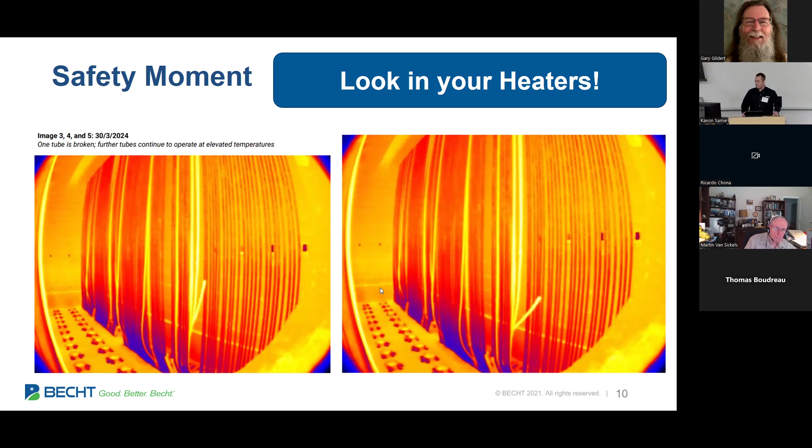Just go look, go think. We can have all the smartest AI tools out there and all the coolest cameras and the nicest heaters. This is not a bad design, but if you don't do the basics and think about it, bad things will happen, unfortunately. So I just wanted to share that moment. Okay, now I'm going to get into the meat and potatoes.

So this is Socrates. Anybody in the room remember Socrates? Good. I see some heads. Good. Yeah, he's a good dude. And I bring him wherever Frank is.

Frank Lu, there he is. He's in the back in the middle. I blame Frank for my love of Socrates.

So he had a triple filter test, and as Socrates got older, he started to realize, I only have so much time to ponder the things I want to ponder. So his time was valuable. So his triple filter test for you to get time with Socrates was supposedly, and again, this is I'm sure part myth, part legend, these three: Is it true? Is it good? And is it useful? So I hope in this quick little 20-minute thing, I am going to pass Socrates' triple

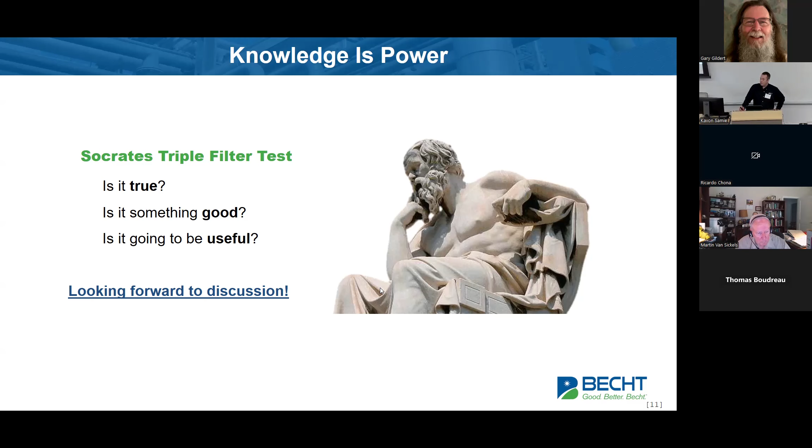filter test. I would really love some feedback afterwards, folks. If you're like, hey, that was a terrible presentation, I didn't get anything from it, please let me know. I have thick skin. It won't bother me one bit. I'm here to help, teach people. Knowledge is power and all that. So anyway, that's that.

So on to what we're actually doing. This is the quick agenda. There will be a lot of text on some of these slides, and I'll probably just talk to it briefly and then go. If there's anything you've got questions about, I'm flexible. Gary, do you care if we stop for questions as we go, or do you like to the end? Okay, cool. So if there's something you see on the screen that you're passionate about, get your hand up. Let's talk real quick. Or if you want to wait till the end, that's cool too. So this is basically what we're going to talk about today.

I already had a bio. So yeah, Exxon and Valero, and now I work for Becht. I'm a bit of a generalist. I'm a chemE by background, a lot of time in process and ops. About 5 years ago, I really started to get into the weeds on fired equipment and thermography. And over the years, I've gotten more into energy as well. So I will say I'm probably a novice in the world of energy. It's pretty cool, in the room here, like Alan, there's people who helped invent pinch. I'm on the very novice side of all this. And I try to participate in API 560 when I can.

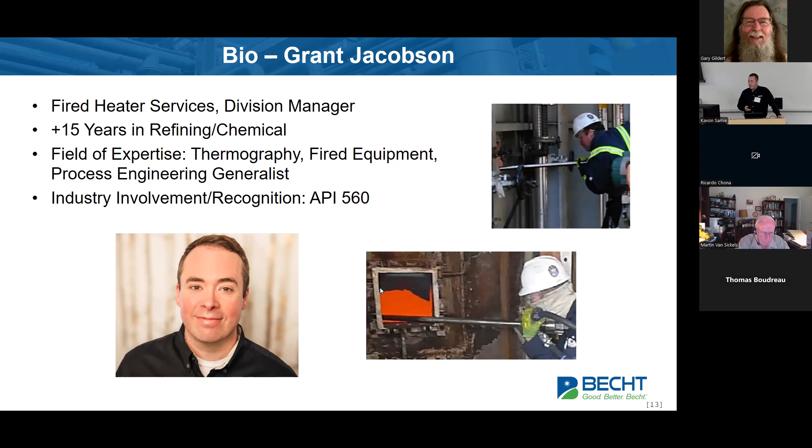Okay. So, energy, and I wanted to talk a little bit about this culture. Realistically, in most refining or petrochemical applications, I guess any industrial application, what priority is energy? I can tell you it's not number 1, but what do you guys think it is? Second to last. Yeah, that's actually probably a good answer. I would say everybody hopefully agrees safety is always number 1, whether or not folks are good at it. Reliability, usually number 2. Profitability, usually number 3. You could say 2 and 3 are kind of interchangeable. And then number 4, energy, maybe. There might be another priority before energy.

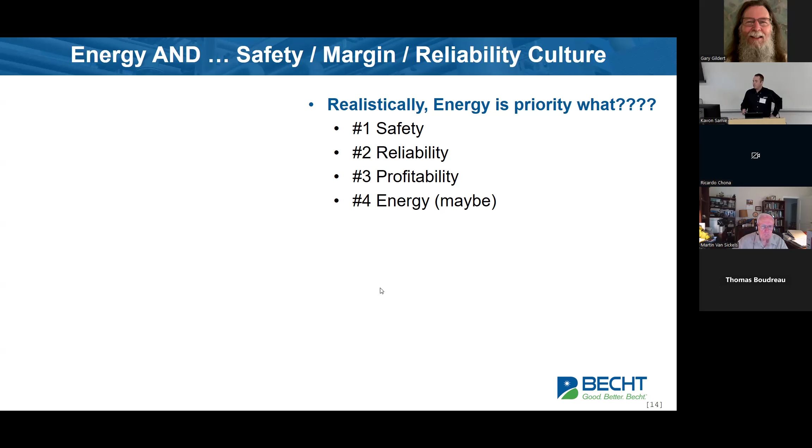The other thing that makes it hard to focus on energy, and Gary, this is the old slide deck, that's okay. I had a new chart published 2 days ago that showed energy prices. Same story, this is just an outdated chart. Energy prices in the US are low, right? There's not a lot of incentive for us to go chase a margin on energy projects. So these are the things working against us.

What I like to think about is, you can have your cake and eat it too. You can be safe and be energy efficient. There's no reason you can't do both at the same time. Ditto to reliability to some extent, depending on what you're trying to do. And I would like to mention, between the US and Europe on the updated chart, which sorry, I don't have in this deck, it's 3 to 4 times more expensive for a megawatt hour right now in Europe than in the United States. So Europe has way more financial incentive to be clever about energy, go build good things with energy.

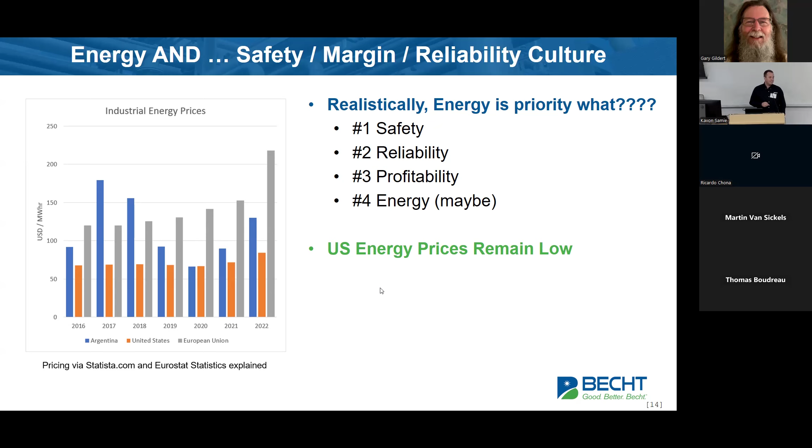The US is a market that's probably less interested in chasing it, but it's pretty neat having forums like this where we're talking about it, thinking about it, because I think it's important. We don't want to let the Europeans get too far ahead of us. That's the way I feel. But I work in Europe all the time too, so they're good folks.

So the things I'm going to talk about, and I'm sorry, of course, this is going to look kind of pitchy because this is coming from decks that I sell off of, but the intent is I'm just sharing knowledge. So sorry if I'm crossing any lines there.

It's not intended to. So the 2 ways that we kind of approach energy stuff at Becht, we've got PEAK, which is a practical energy assessment, and then Bravo. Basically, PEAK is high level, simple, practical. Bravo is the really detailed one, to get a bunch of really smart people looking at stuff, lots of things to do.

These are just kind of, I think, some benchmarks you can think of in this realm. And there's other consultants that do other things. This is the way we kind of do it, but I wanted to show it to give you all a flavor for how people go tackle this stuff. And a lot of companies have this in-house. You go to the Shells, you go to the Exxons, they have things like this that exist within their operating systems already.

But Peak for us is a lot simpler, a lot cheaper. Duration is much shorter, much smaller team, only 3 people if we go to a Peak versus a Bravo, it's 6 to 8. It just depends what you're doing. Also, in Peak, which is what I'm going to talk about a little bit more today, on the practical side, it's really just kind of a lot of checklists and spreadsheets.

I know that's not sexy, it's not cool. But when you're blocking and tackling, it's culture and behavior and how are you communicating? What are you focusing on? When you get into the more complex stuff like Bravo, you're talking pinch, you're talking how do you look at the energy efficiency of units, all sorts of fun balances and things like that, which you can do on simple sheets too. But these are kind of the 2 categories that I break this stuff into.

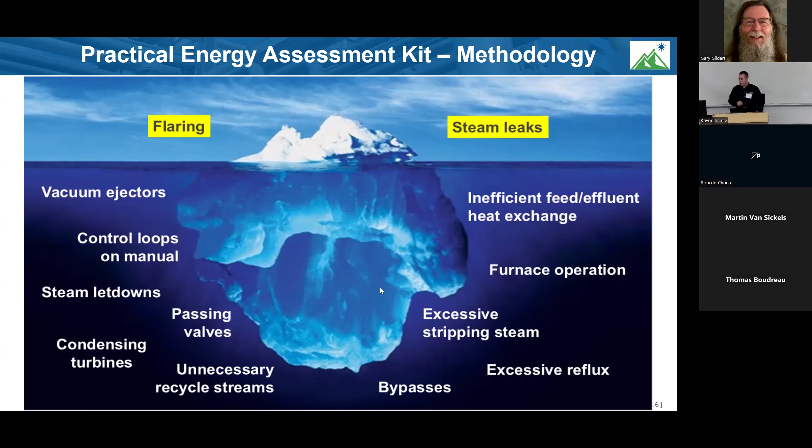Bypasses are a great one. I love walking hot trains and cold trains on crude units. People accidentally leave bypasses open all the time. And most of the plants in the US, unfortunately, are a bit older. We have less instrumentation. You don't have the TIs to be able to easily tell something's open. So, walking it, thinking about things. The reflux one's a good one too. Sometimes you just spin up columns and you don't mean to. So anyway, lots of examples there.

So the way that I like to approach this practical stuff, it's a tool that basically is just a big Excel sheet. It's a fancy Excel sheet is the way I would think of it. But to be practical in energy, it's people and processes and practices. It doesn't matter what kit you have built. If you're not running it the best you can, it doesn't matter. So the way this score thing I'm going to show you is set up, it's got 4 elements, 21 sub-elements, a bunch of different topics.

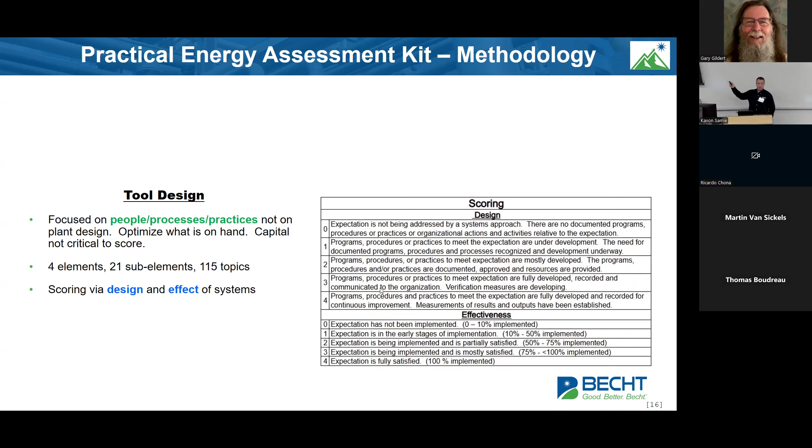The scoring is set up like this. If there's any ex-Valero folks or current Valero folks out there, this is where I was exposed to this kind of methodology. You'll probably recognize this. I think originally this idea came out of FlowServe, one of the roto vendors long ago. But I really like this scoring mechanism for looking at how are you designed, how are your systems set up. Design doesn't just mean how's your plant built. It's what practice do you have in place? What culture do you have in place?

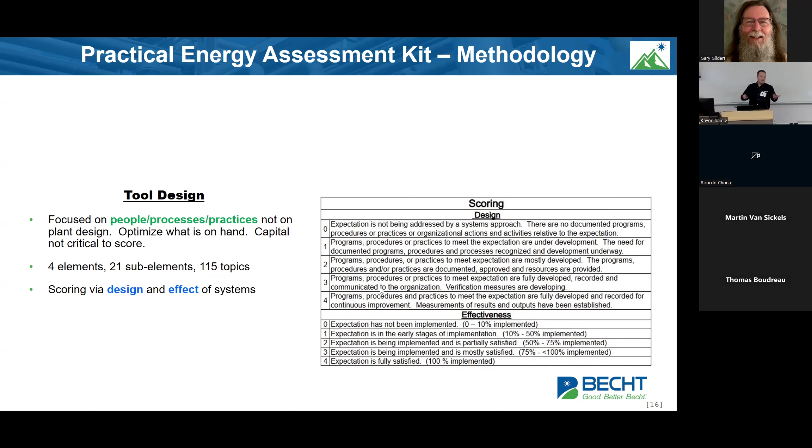And then effectiveness is, are you doing what you said you were going to do? So a pretty simple way to just kind of go look at stuff and rank yourself. And once you can kind of rank yourself, you get out of the qualitative feel and get a little more quantitative to see the gaps.

This is like a little performance matrix when we go do these kinds of energy assessments to kind of say, where are you versus the others out there? Not nearly as fancy as like the Solomons and those. This is more like, what do we see as folks working in this realm and focusing on energy? But that's what we kind of look at.

And I like to mention, you see folks who we consider good, in our little tool here, based on these rankings and these elements, you get to 75% and you've probably caught most of the really good stuff. Do you really need to focus more at that point? Probably not. Then it's more of a maintain kind of position. The first time we go in and do stuff, you're going to be in the 20 or 30% range. And I'll show you an example of that in a minute.

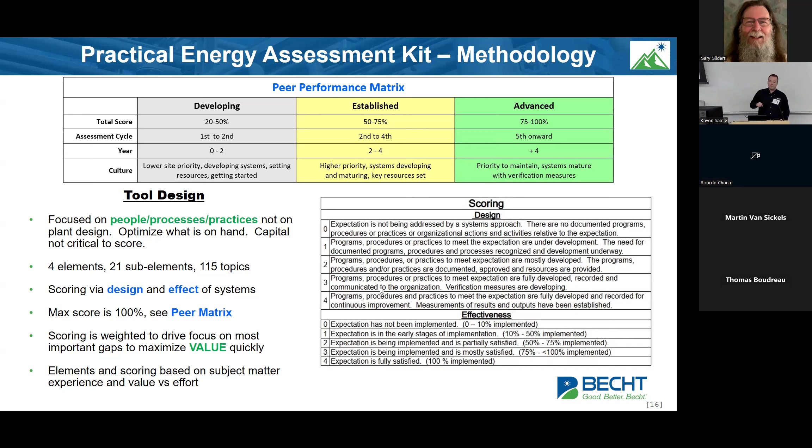And then the last two here, scoring's weighted in this kind of tool. So if you go build something or do something like this, think about the value behind the thing. Not all focus is the same. And I'll go to the next slide to kind of show that.

So this is just a quick screen capture from this little organization tool that we use. And when I'm talking about scoring and what matters, this is basically saying there's different weights for the different sub-elements that we're looking at when we go do these. The gray is the max score and the yellow is the actual score from this example. So on this one, this was the first time, fuels refinery, mid-sized, 33% was their score. They were trying, but they were kind of on the beginning of their journey.

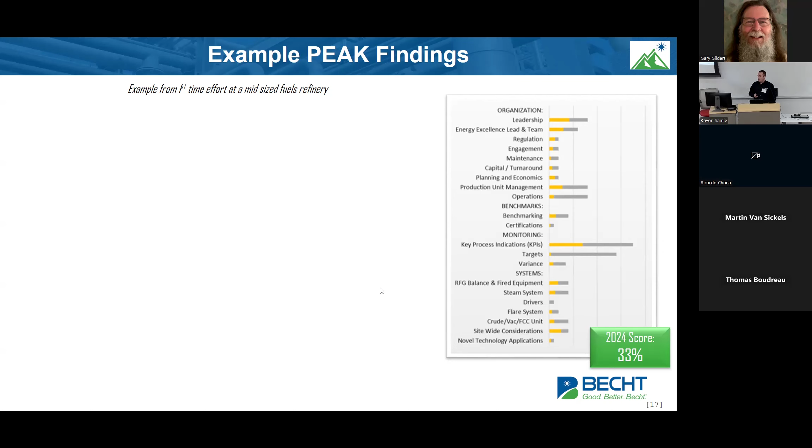So talking through the four big elements, and I'm not going line by line or anything. The key thing that they were doing right on the organizational side, they were starting to think about it. They're starting to talk about it. If you don't even talk about energy or think about your culture or what you want to improve on, there's no point in doing it or focusing on this. So that was a big thing out of that.

The other one that was really interesting, the panel operators weren't really empowered to go and chase things or do things better. It wasn't easy for them to see, oh, I could reduce the stripping steam, or why is my reflux so high on this column? There weren't really any easy tools for them to watch that stuff with. So that's a big one too, organizationally, that we find.

Going to the next one, benchmarks. So there's some good stuff out there. ISO 50001 and 2. There's also a really good list that the Department of Energy puts out that has a lot of good ideas based on different technologies that you might have in a petchem or refinery. Good things to look at. It's a really small piece of the whole puzzle.

Like when we go do these, monitoring is a big one. KEV is key energy variable. Some people call them KPIs. Whatever you want to call it is cool. You've got to have something built. You've got to have something you're measuring or looking at. For KEVs, for most mid-size, mid-complexity refineries, you're probably talking like 20. You don't need a bunch of these. And a lot of them are kind of cookie cutter.

You can easily Google the efficiency calculation for fired equipment. That's like the first one. It's just easy, folks. Here's the calc. Go build it, put it on every single heater you've got. Really easy to go chase. So stuff like that. And then systems.

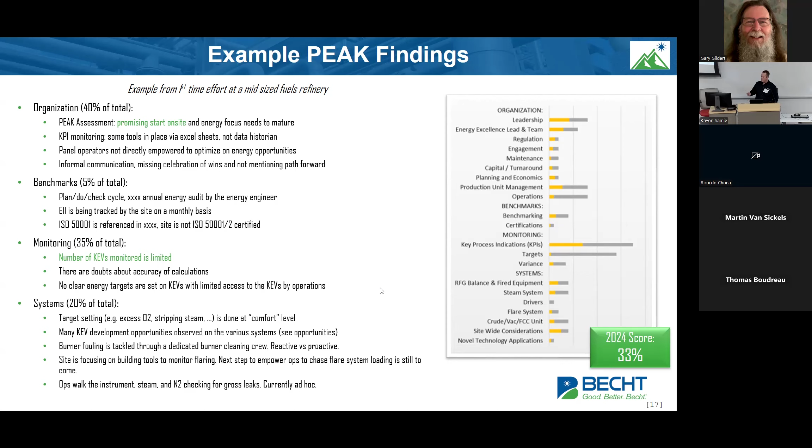So after you have all that stuff done, how do you go get better? So it's nice to have some sort of roadmap. So I'm just going to show you guys, here's how we kind of look at it.

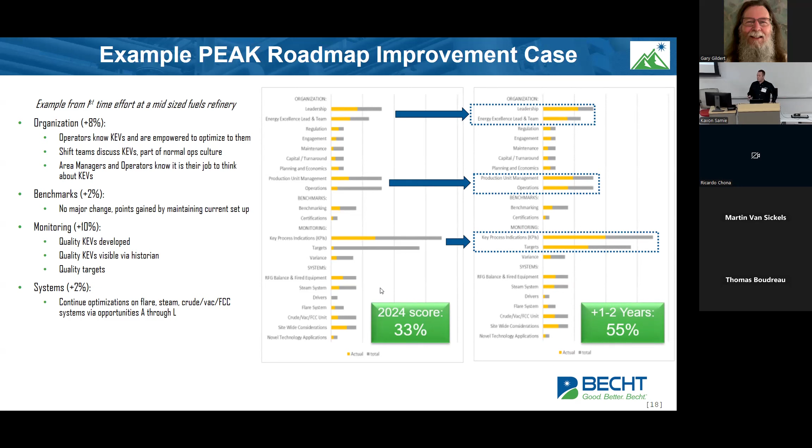So, the big areas that this plant was going to focus on were these three. And with that, they were hopefully going to get around 55%. Of course, we're making assumptions in the scoring when you do a shift case like that. But it helps to kind of visualize the path. That's the intent. I got all this stuff. Here's how I rank it. Then what should I go do first? What gives me the most bang for my buck? That's the point of doing something like this.

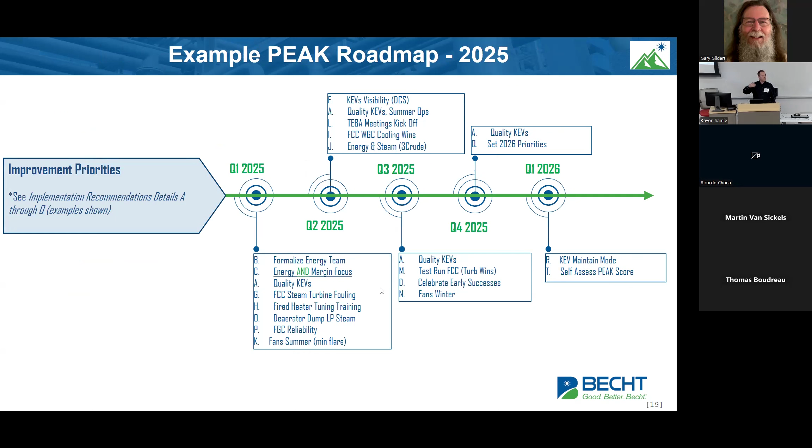This is another way to look at it. So this is a roadmap for this example. And these were all the different things to go focus on. So each one of these lines was basically a simple slide or two saying, hey, go do this. Like, this is the thing that will help. And then just some basic times. So it's not set in stone. You don't have to stick with it, but at least there's a plan you can try to go and execute. And then these are just a couple examples of what these things look like when we write them up. Pretty simple, pretty concise.

The simpler you can make it, the more visual you can make it, the better for almost, I think, any kind of industrial situation you're looking at. People have short attention spans. TikTok, everybody wants the 10, 20-second video kind of thing. I think we all need to be aware of that as engineers. We get really detailed, really wordy. We got to step back from that stuff sometimes if we want people to understand what we're trying to communicate.

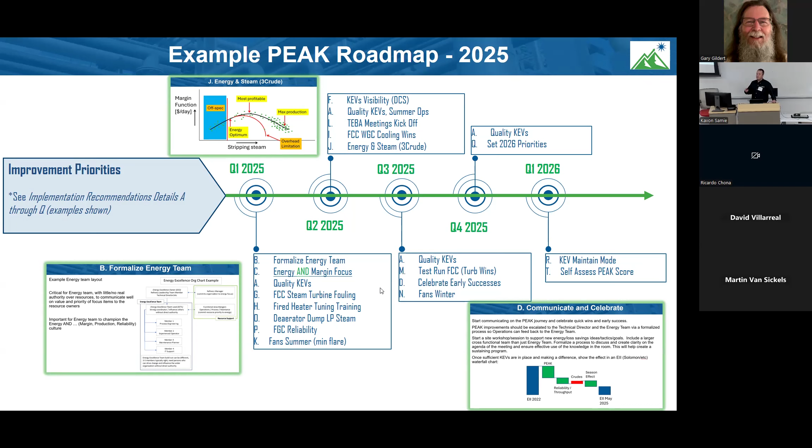Okay. And then the next thing I wanted to step through, this is just kind of a fun example. And I believe this is like a crude column stripping steam example. So there's multiple things moving around on a crude column and the way you might want to run it. So obviously you're off spec over here. You don't want to be over here. Max production, pretty easy, just doing your thing over here. You don't want to put so much steam in that you accidentally pinch yourself and your curve here has to go down. You accidentally limit yourself. But then somewhere in between everything, this is like your most profitable point.

I think it's also worth mentioning, and sorry, I totally goofed up the order there. There's going to be an energy optimum side and a max production or margin side. And it never makes sense to sacrifice margin for energy. Almost never. I'm sure there are examples out there where it does, but margin's almost always going to win. So I like thinking about things in this kind of manner. Like, where am I on the curve? Where's kind of the best direction I should go?

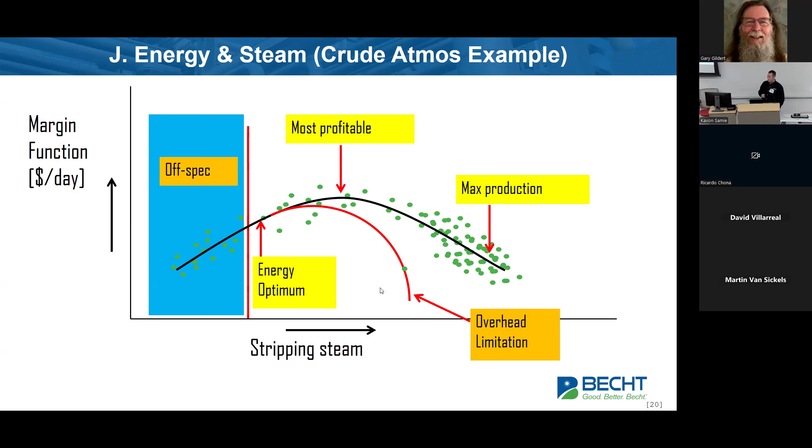Maybe it's not perfect, but if you get this 80-20 kind of right, you're in a better spot. And you got APCs, all those kinds of controllers. They're way more complex than this, but it's essentially all an APC is trying to do. It's just kind of feel. And you can build these simple correlations just in an Excel sheet, go data mine a bunch of stuff and build these curves, do a polyfit, and then boom, you got a KEV you can go use on a crude column. Not super complex.

This is getting into more complexity. I am not going to talk to this whole thing. When we get beyond the practical stuff, the thing that I'm calling peak, you can also get into looking at, am I applying the technology the best way I can? If there's anybody familiar with EII and Solomon, it's good stuff. The thing that's kind of frustrating sometimes about EII though, is you're compared to your competitors regardless of how the kit is set up. And yeah, there is complexity in there for how they try and do it. But there's other tools and methods out there you can use that look at, hey, this is the way this plant from 1960 is built. What is its equivalent best it can do?

And then you kind of rank yourself off of that and go focus on your improvements that way. So that's what this slide is kind of talking about, and just focusing those KPIs. Because there are some plants without significant capital, they're never going to be better than like a Solomon 3 on EII, or third quartile.

And it is what it is, but it's kind of frustrating when you're one of those sites and you're just always screwed. You're just, oh, great, I'm always third or fourth quartile no matter what I do. It's kind of nice to look at benchmarks in different ways. And then you focus, what is the best I can do with what I have?

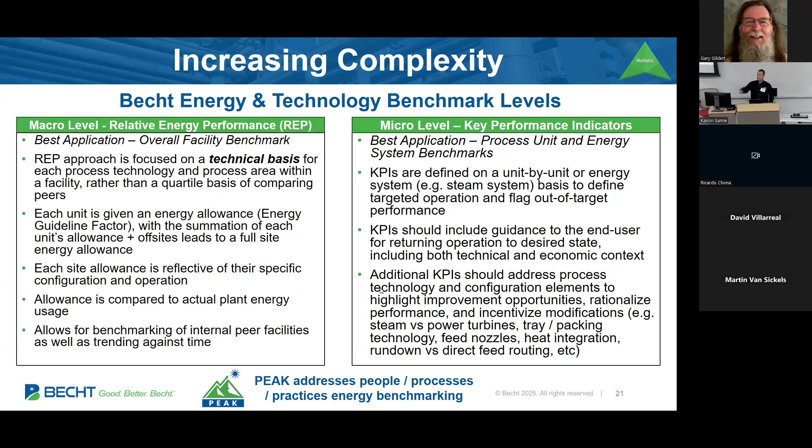How am I doing on time, Gary?

Okay, great. I just wanted to speak briefly about pinch, and there are people in this room much more qualified than me to talk about pinch. But I like to share a little bit about it. I think it was developed in the 70s.

Hopefully this is right. Alan, please yell at me if I'm wrong. Was it earlier? 78? Okay, good. Yeah, so about the right ballpark. Yeah, no, I'm not trying to throw any curveballs at anyone.

Pinch is good stuff. It's basically about optimizing the best you can within a system for your hot and your cold. There's some specialized software still used for it. I believe those are still the ones that are kind of around. Basically a lot of plants that were built probably in the 80s and 90s, this was incorporated in the design. Plants that were built before that, you kind of got to go back and do a pinch study on it and figure out, okay, how do I want to move around my heat?

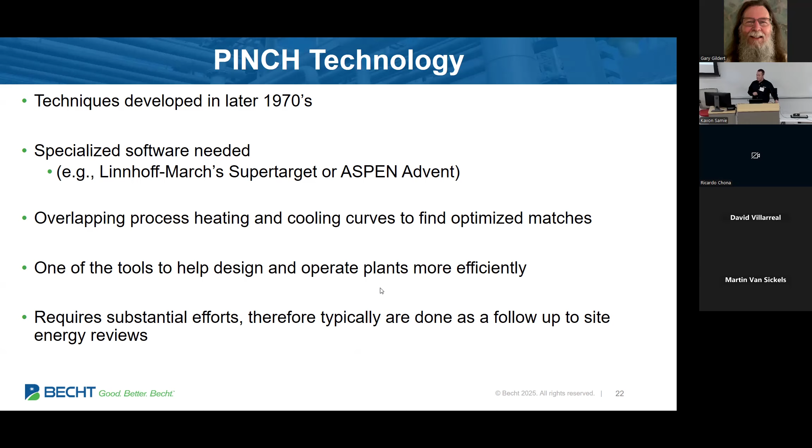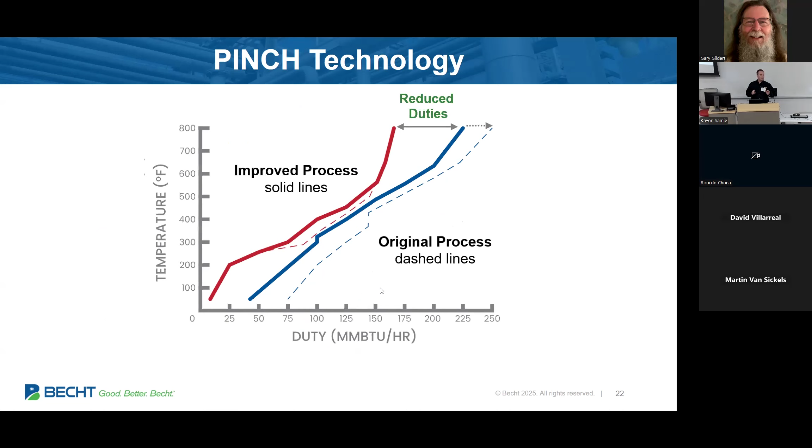A little bit just about how we like to apply pinch. It can get pretty complex and pretty costly. So I like to apply like the 80-20 kind of rule. Whenever I've helped with one of these, and I'll admit, I've only helped with like 2 of them over the last 2 years, and I've never been crunching all the numbers. It's very much about where can you go to the least amount of effort, most amount of value. So you don't want to just go in carte blanche for an entire refinery and say, hey, I want to do pinch on everything.

You want to go kind of look at the units and understand, okay, which ones probably have the best low hanging fruit? Because usually there's a couple that will be the best. So that's kind of the 80-20 rule there. Low capital first is important, which I kind of already hit on. And I'd like to just emphasize, pinch is good. It works. This isn't new and complex stuff. ChatGPT could probably go learn and do some of it. I haven't even thought about that yet. But yeah, I recommend it. It's a good tool. It's a good methodology.

Last thing I just kind of wanted to show here around energy project ranking. So if you get into a big energy study and you're looking at all of the opportunities I have across a given plant, I like sorting it in this kind of method to help prioritize. I've seen this out of some of the majors, this kind of curve. I don't remember which one it came from. I was going to give them credit for probably putting the idea out there first.

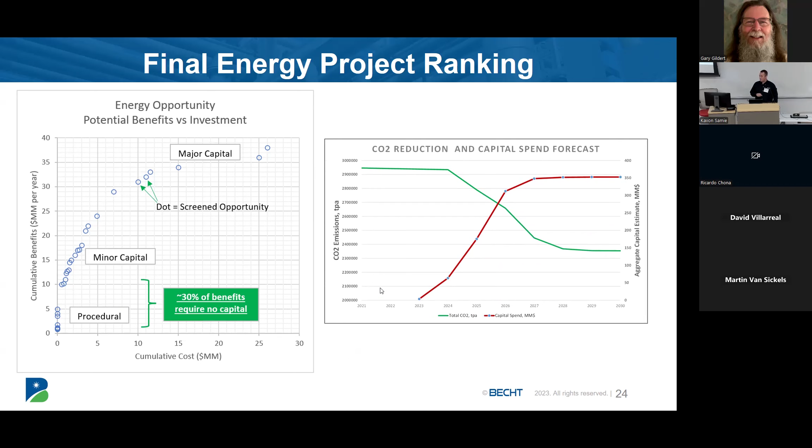The other one that's coming up more often nowadays is CO2 reduction. This graph here on the right is actually a Canadian refiner that was looking at some capital spend versus expected CO2 reduction by becoming more efficient. So this is the other way people are kind of prioritizing these energy projects, what to do when, why to do what thing, magnitude of change, which is fun. And I think this is my last slide.